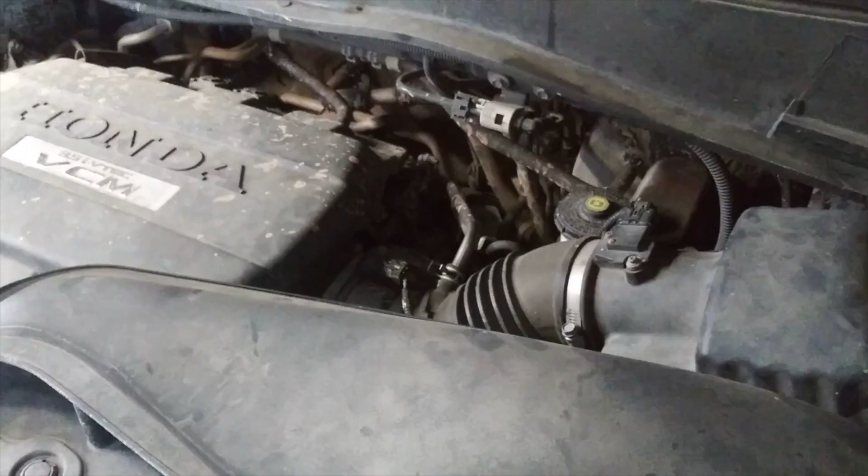Alright, I'm gonna get started by removing the stuff that we gotta take out. I'm gonna take out this air intake, gonna take out the battery and the battery tray. I got started with watching videos on older models and the Honda service bulletin, or the technical manual, which talks about removing these things. So I'm going to get started and check back in.

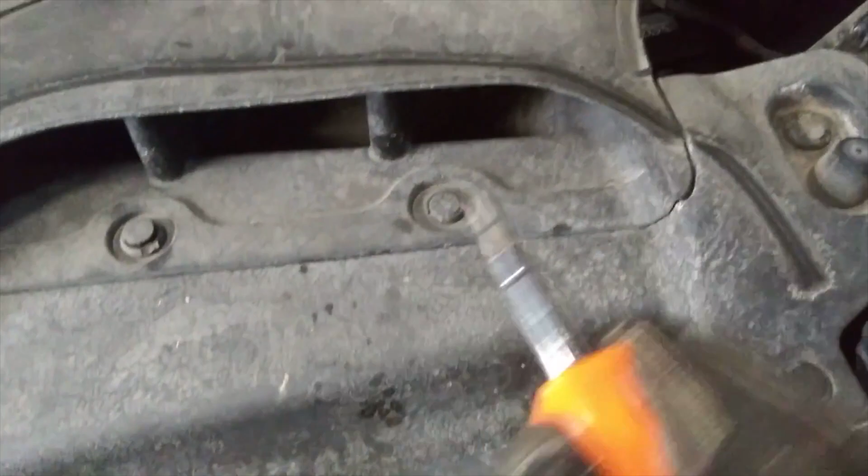Okay, first things first, holding in this manifold are these plastic clips, and just so that you can see how to do it, it's kind of a two-part process. You've got to pop up the center with a screwdriver. Oops, sounds like I just broke this one. And then the whole thing comes up, and yeah, you could see I kind of broke off one of those little ears there. Hopefully that's not too big of a problem. So I'm just going to go through and do all those.

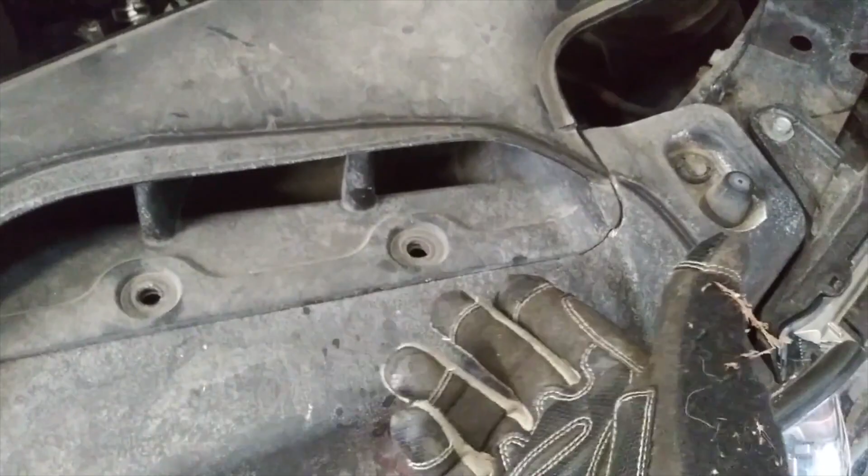Well, you gotta love it when I say I'm going to do all of those, and it's just these two right here. So now I'm going to just take the whole manifold off, or the air, I don't know what this thing's called, but there you go, just pull that off, and you can see it just gives me a lot more room to work with down there.

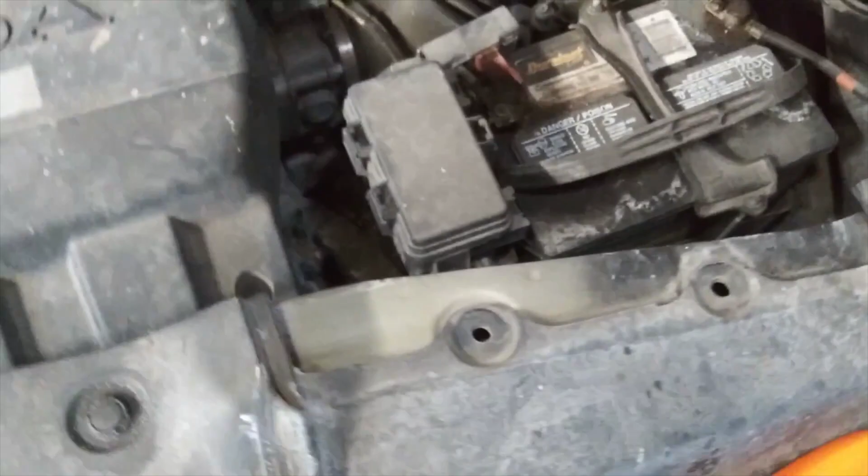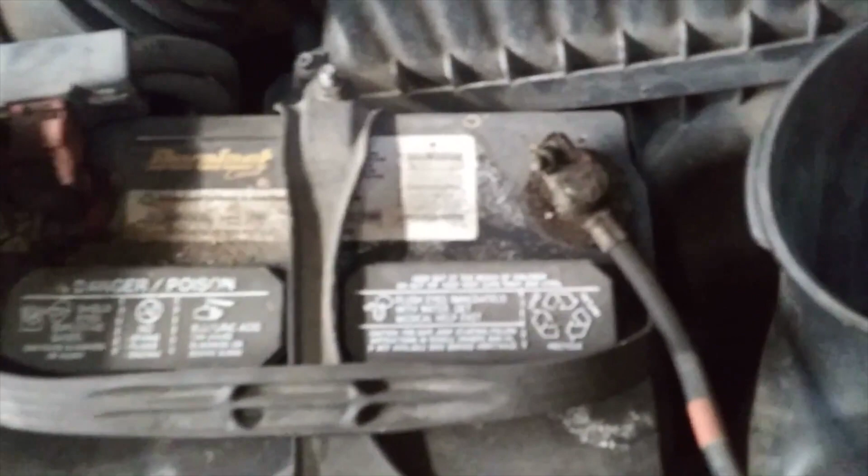So I'm going to, of course, take out the battery, but I'm also going to take this opportunity to look at the battery. I bought this car a bunch of years ago, and I haven't replaced the battery, so I'll see if I can find a date on there and see how it's doing. Well, looking at the battery, there's been a little bit of leakage. There's not a whole lot of corrosion.

I'm going to take off the negative terminal, then I'm going to take off the positive, then I'm going to take off this bracket so that I can get the battery out of there. Then I'm going to have to take off the battery tray that's down there. But when I take the battery out, I'll do a further inspection and hopefully clean it up and go from there.

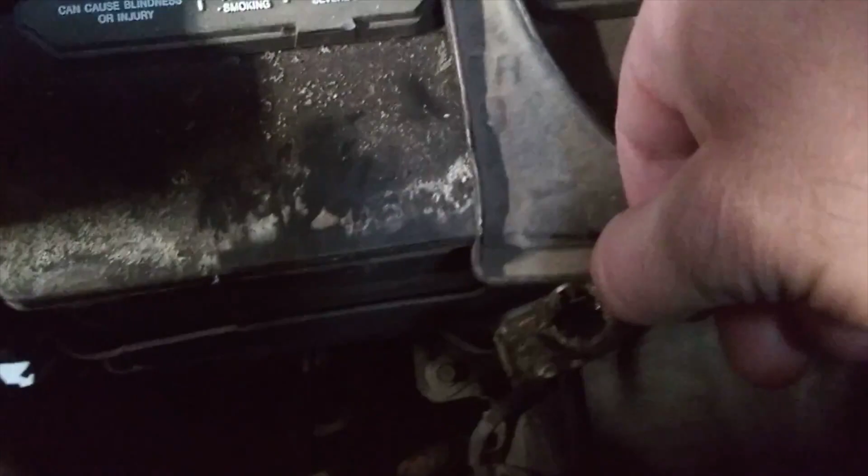I don't know about you guys, but for me, the hardest part of working on a car when you got to pull the battery is dealing with these little things that hold the bracket down. You don't have a lot of light down there, but there's this little post that's got a bolt on it, and you've got to get it loose enough so that you can push this down and pull out this little metal piece right here that holds it in.

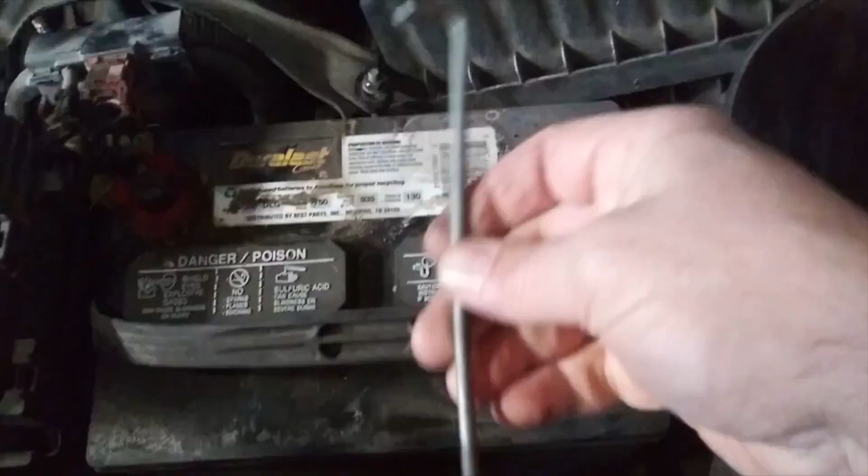So it just takes time, and it's frustrating because this thing will kind of wiggle, and you can't get a socket on there because it sticks up too high. I guess if you had like a high clearance socket you could. So anyway, you just got to take your time with it and get it off there eventually. I was able to get it off. I don't know if you can kind of see, but it hooks into the little tray and then holds this down to clamp the battery in place.

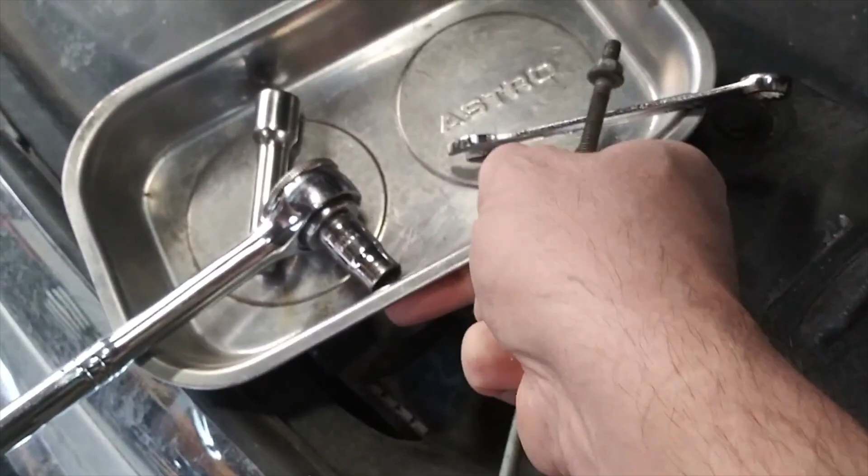I want to take a minute to mention this handy little thing. If you don't have one of these, when you're working on a car, it's super handy. It's got giant magnets on the bottom there, and you can see it just holds any metal part in place. So I use it for tools, but then when you start taking out bolts and screws and stuff, you just stick it in there and it's going to stay in place, and then you'll know where it is when you need to put it back in there.

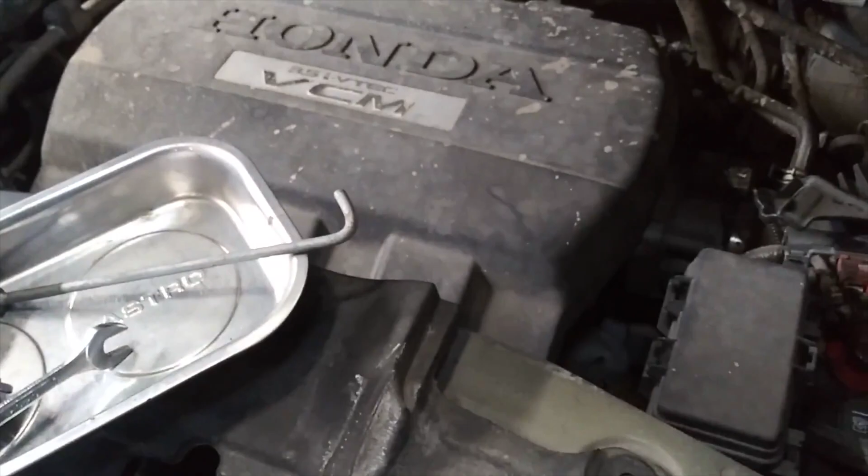Alright, I'm going to pull the battery out and see what I'm working with down there. I got the battery out, and looking on the side here, it's 12/16.

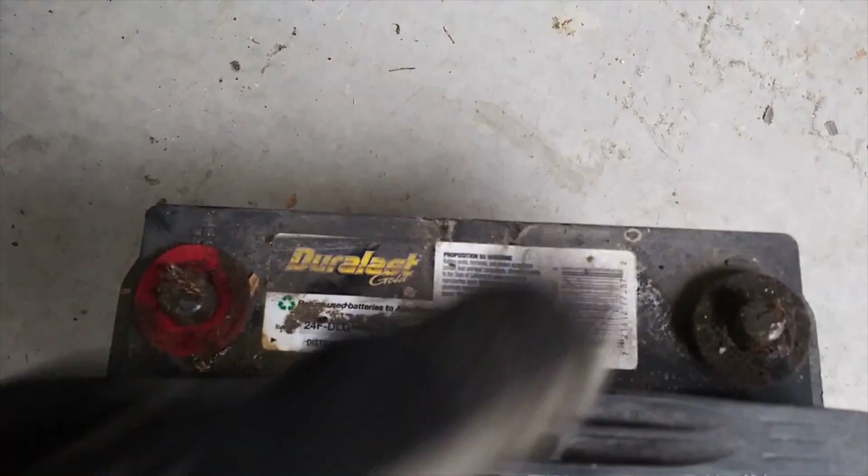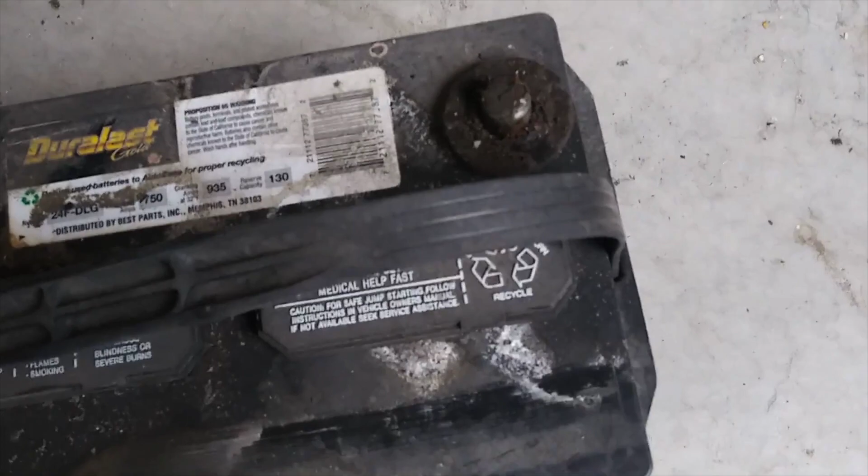It's now January 2019, so this battery's a little over 2 years old, so I'd say it's still good to go. It's kind of dirty on top, but not really corroded or anything, and the previous owner did a nice thing, put these little washer things on here and put some good grease on there, so I'm just going to kind of clean it up, not really functionally, just so it looks a little nicer, because why not?

Well, I got it a little cleaner. You can see it's not that big of a deal, but at least this way, if it was in focus, you could read the label and at least know what brand it is. I don't know, who cares?

Anyway, back in here, there's this plastic tub that the battery sits in. I'll clean that out a little bit too. I'm just going to set it on the side, and now we're getting into the meat and potatoes. The starter itself is located down in there, so it's kind of below the battery tray. So I'm going to work on taking this thing out. It looks like there's a bolt right there, and we'll see what else we got.

Okay, so this is like a whole thing. It looks like this is the fuse box, and it looks like it's bolted into the whole tray, which is also bolted to this air intake. So I'm just gonna start taking stuff apart and see what I can do to get this out of here.

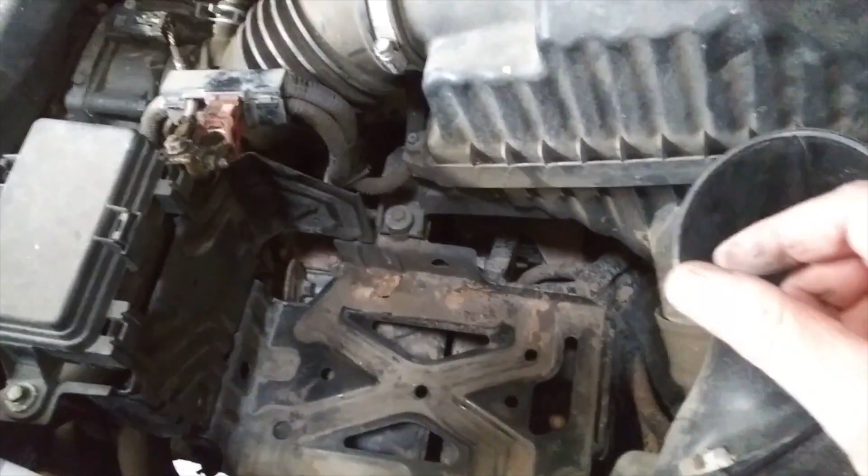It's possible that I'm not gonna be able to get this out of here, and I'm gonna have to come up from below to do the starter, but underneath the car, oh geez, that's a whole lot of no down there. Alright, so hopefully I'll be able to get this out of here and get in there.

Yay. I got this bolt out here. It's this guy right here. And then looking down here, this guy's got a couple of rubber gaskets that go around this plastic piece. So I'm going to pull that out and see if that gets me any looser over here. Okay, I got that bolt loose, and that's basically all that's attaching this to the battery tray. And then this has two little ears that you've got to pull out to slide this off, and now we have the battery tray free of the other stuff.

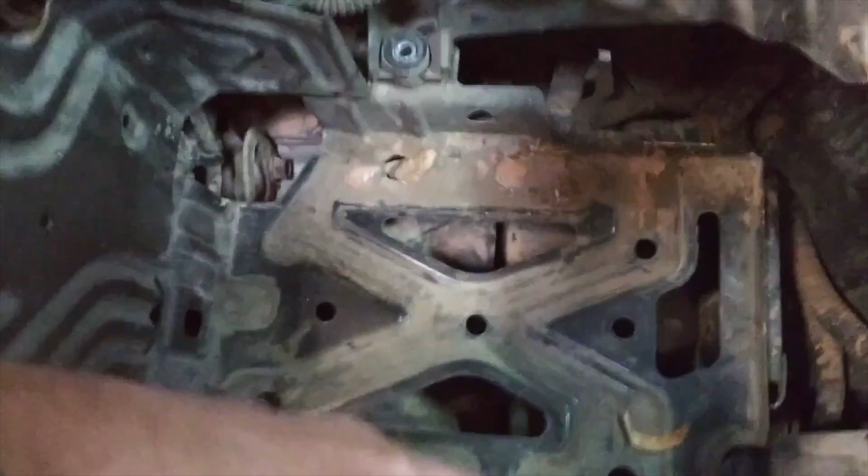It looks like it's bolted to the frame with two bolts, down there and down here. I'm going to start on those and see where I got to go. It might also be that guy is part of what bolts this to the frame, but I'm hoping not. There's also bolts down in there, which probably bolt this side to the bottom. I'm not sure if I'll have to take this off to get that out. We'll see.

Well, I screwed up and some cursing has ensued, but I've edited that out. So I dropped one of the bolts down there, and then that wasn't enough, so I dropped the socket in there. So what I did was go inside and get some of those nice little rare earth magnets, and I just taped them to this screwdriver so that I could reach down in there and grab it. I know I could buy one of those extendo magnetic bars, and hopefully I will, but I'm real cheap.

I got this side piece free, but it turns out there's a little plastic bracket that holds this wiring conduit thing to this. I'm gonna have to pop that off to free this piece. And there are actually two harness things that snap on here, and I don't really know how to get them off, so I'm gonna now just focus on taking the bottom out, because I think I can leave this in place and then access the starter that way. We'll see.

Holy cow, that was challenging. Alright, so that bolt, easy. Even that bolt, not so hard. This guy, super hard, because the wiring harness kind of covered it up. So there's 4 bolts to get this. I'm now working on this one.

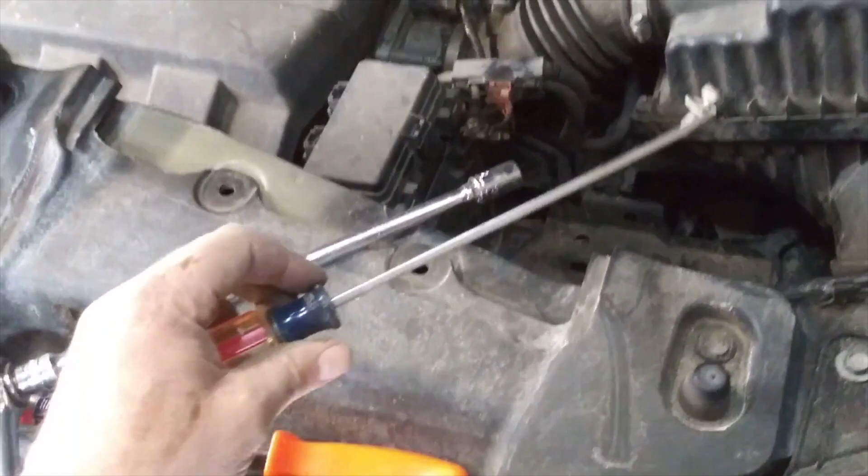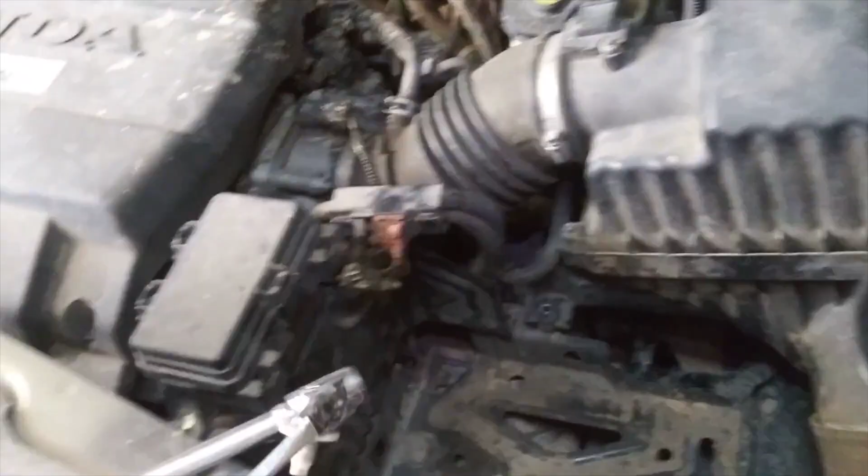I gotta say, my little magnetic buddy here is really coming in handy, because getting into there is super hard, so I would definitely not try this job without one of these tools. Well, so those were definitely the 4 bolts.

The tray is loose. The issue is that it's being held to this wiring harness, or realistically this wiring harness is held to this to hold it in place by this kind of plastic zip tie. And it kind of goes through to the bottom or the inside of this, and so I think I'm just going to cut it off and see how it goes.

Well, yeah, cutting that zip tie definitely got this free. I mean, if this is a have to do for the job, I would just cut it first, because it'll make it a lot easier to get to that bolt that's holding this thing down. Okay, let's see. Okay, still held on. So that's this side of the battery tray.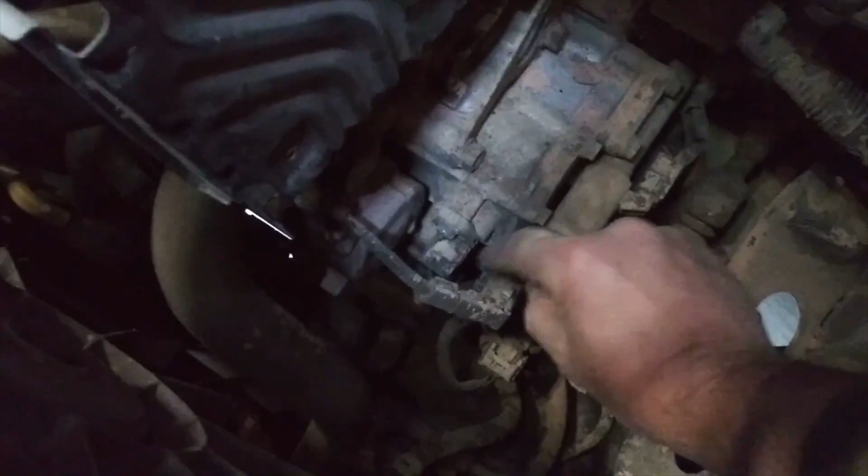There's the starter. I can finally actually see it right here. Looks like I'm going to be okay with not having that there, and I'm just going to dive into the starter now. One more thing, I'm also very lucky because there's that bolt I dropped, and it's sitting right where I need it.

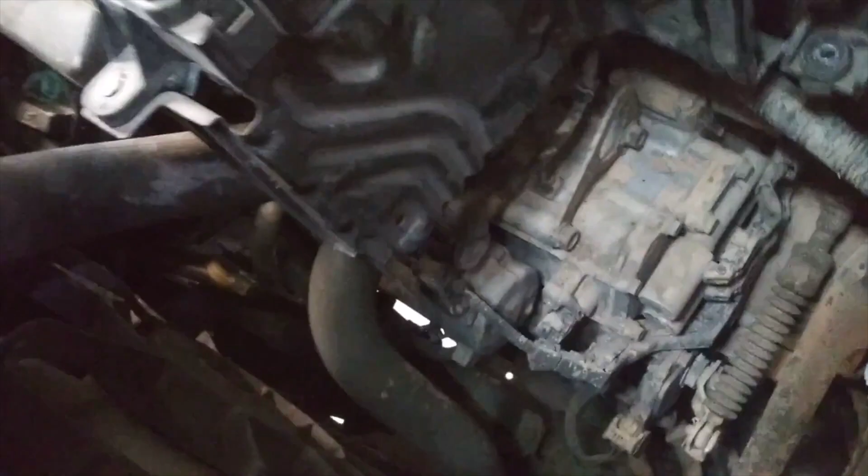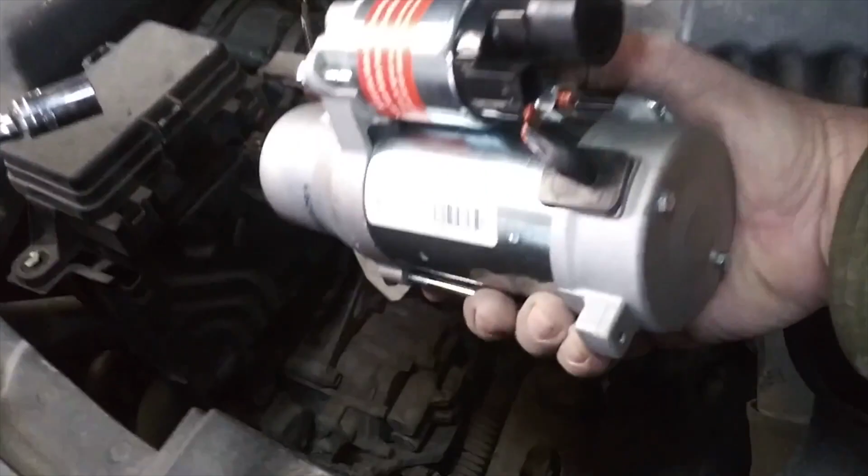Something that I think is kind of handy when I'm replacing a part: this car's 9 years old, so after 9 years of dirt and road and wear and everything, the part that you're replacing kind of blends into the background. So I like to take the replacement part so I can look, especially for electrical connections.

So, when I'm going down here, I can sort of see, oh, well, there's where this wire comes into here. What does that look like on my actual replacement part, and that way I'm probably less likely to break something.

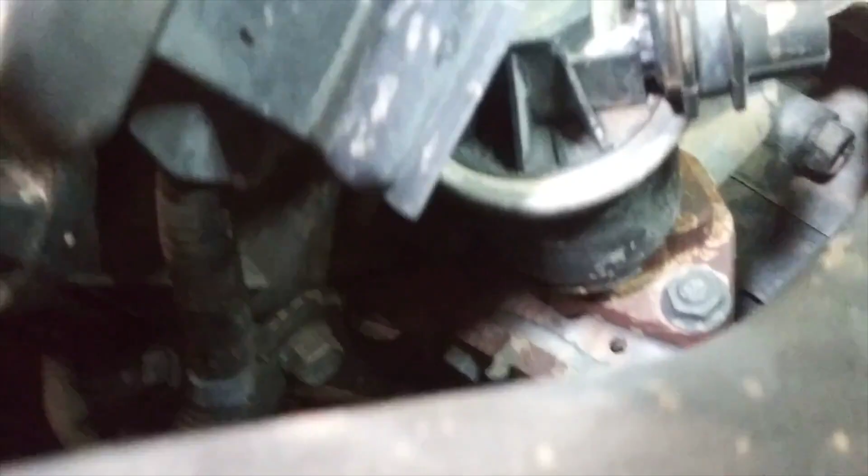Alright, here we are, finally getting down to the meat and potatoes of the starter. So, there is the starter right there. Oh, this is horrible lighting. Let's see if I can do anything to improve it. No, not really. Anyway, the starter kind of hangs out down there.

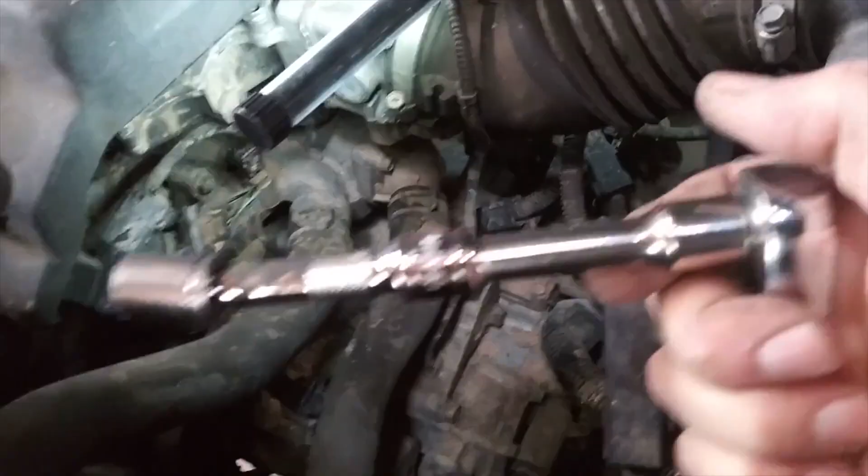I've found I'm going to have this 14mm socket on 2 extensions. My other extension is just too long. But I got to kind of thread it around, well, maybe it's the thermostat, I'm not sure. And then to get it down into, oh, this is horrible, you can't really see it, but there's the top bolt right there.

Before I do that, I'm going to see what getting to the bottom bolt is like, and just see what combination of things I'm going to need to make sure I have what I need. Okay, well, top bolt is out. Man, that is hard to get to. You really got to thread through this thing with those 2 extensions.

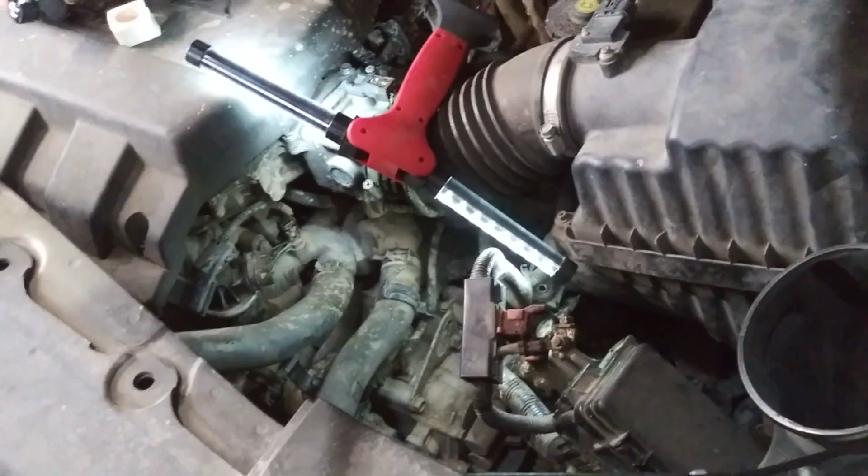I had to use a breaker bar, so I put this old bike tube on here to hold the wrench in place, and then use that section of old fencing pipe. Once it broke free, it was super easy to get out, but getting it to break was hard.

Now I got to dive into the bottom bolt, which is incredibly hard to get to. There's like no way to even get light down there. You can't actually see it, but there's this wire thing. That's the transmission fluid dipstick, which I took out, and the bolt is back here, but getting that clearance is super hard, so haven't quite figured it out, but was too frustrated to keep trying. So now that I got the top bolt out, there's no going back, so here we go.

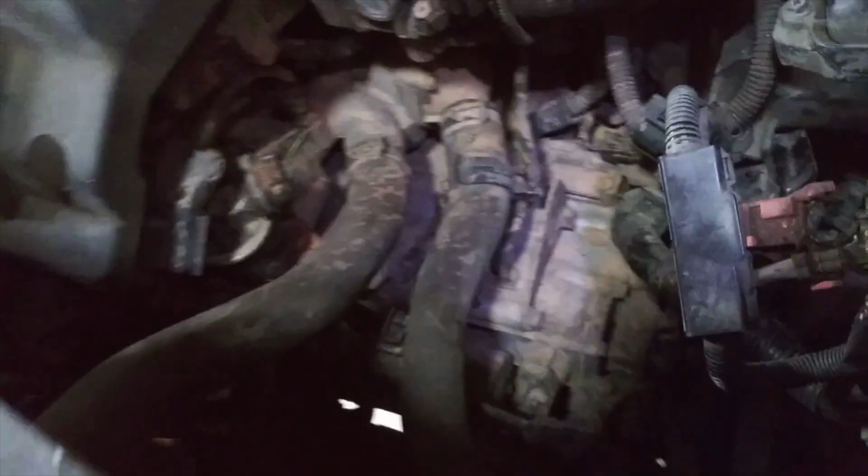Well, that was crazy interesting. So basically, in order to get to that bottom bolt, you gotta kind of thread through and around this stuff. Let me hit that light. Gives us at least a little something.

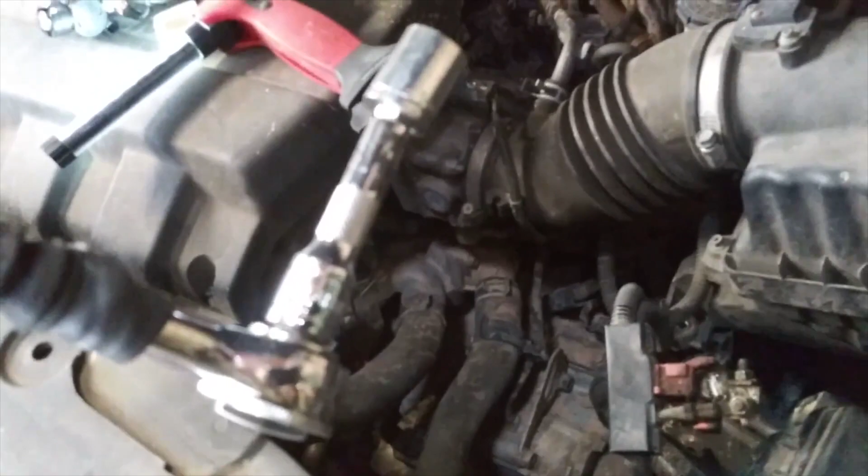There's like, man, I don't even know if you'll be able to see it at all. No, not really. But basically, right to the left of the transmission fluid dipstick, there's a thing you gotta kind of go in. I went in with the 14mm and then a socket and then this thing, but you gotta thread the socket wrench on so it's facing up, because you're gonna need to get that breaker bar on.

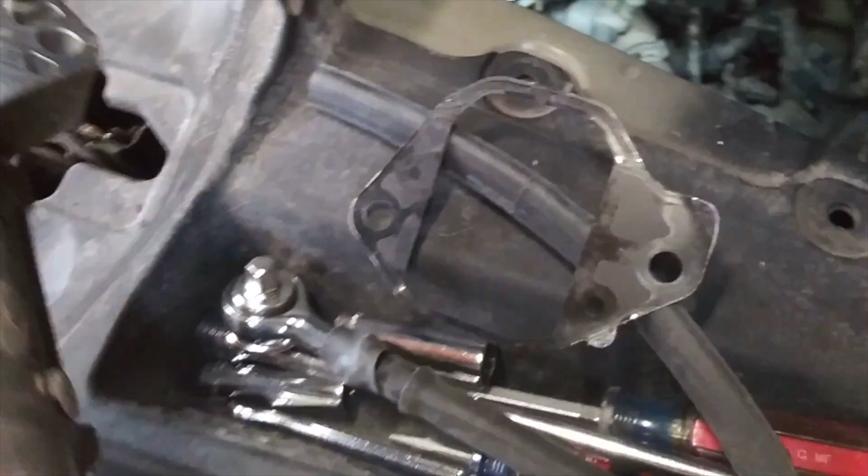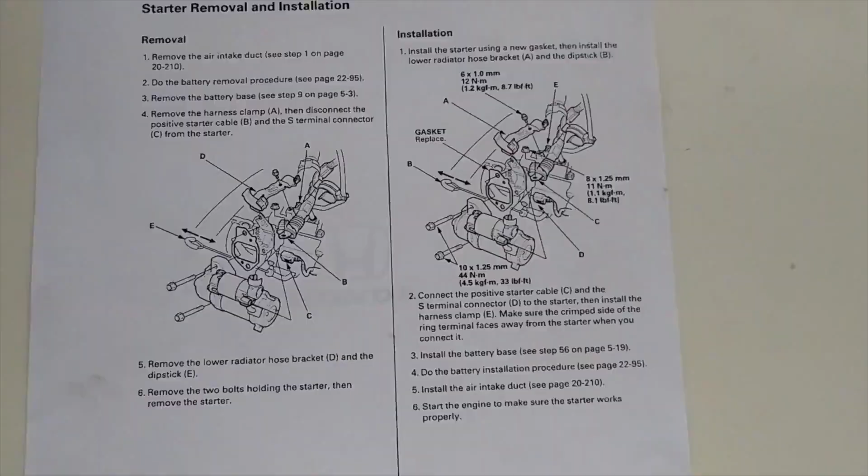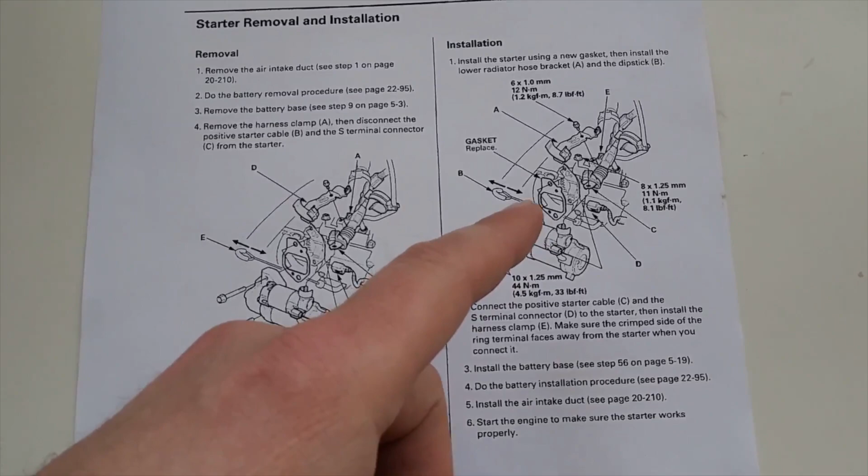So that's where my phone ran out of recording space, so it stopped recording. What I was going to say is that's where I should call my father-in-law, because he would tell me what to do. And he advised what the service manual suggests, which is to replace the gasket. It says replace, theoretically I guess I could go to Honda and buy a new one, but I just put the old one back in there because it was in fine shape.

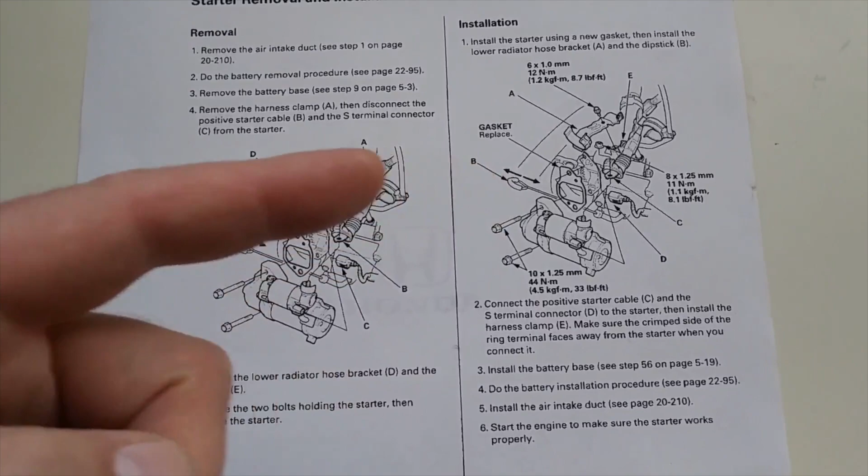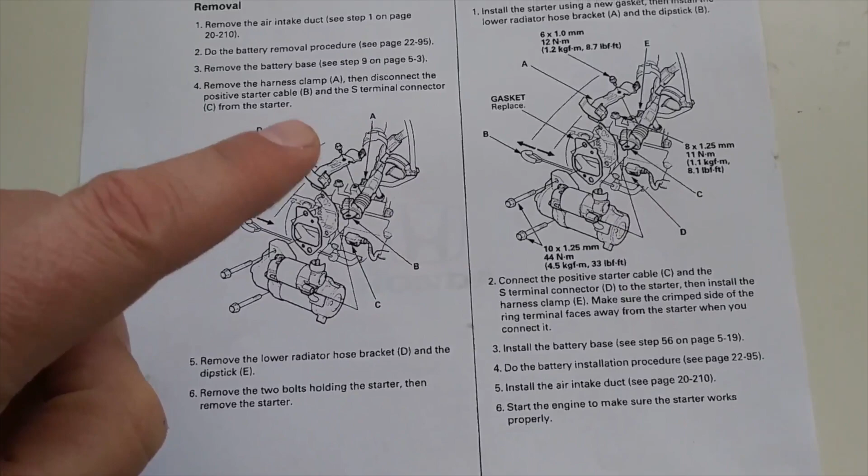Also, I wanted to point out that on the removal, it does say to remove this radiator hose bracket. I ended up just popping the radiator hose out and moving it over, but it does call to remove it, and that would make it a little easier to get down into the starter.

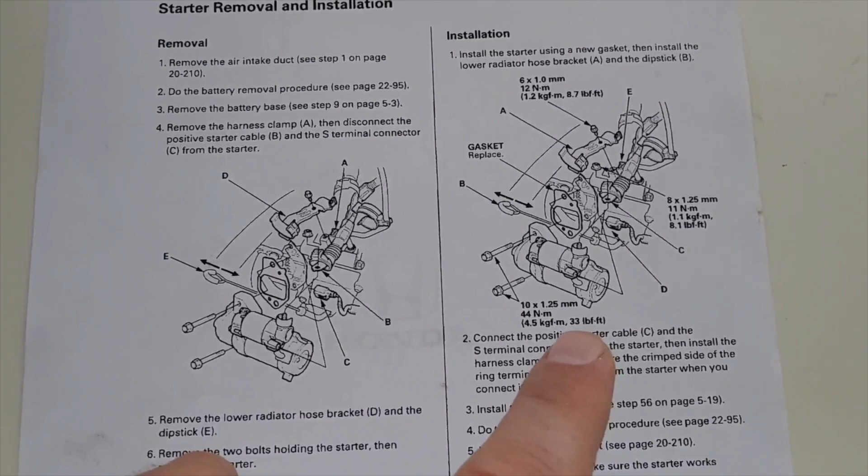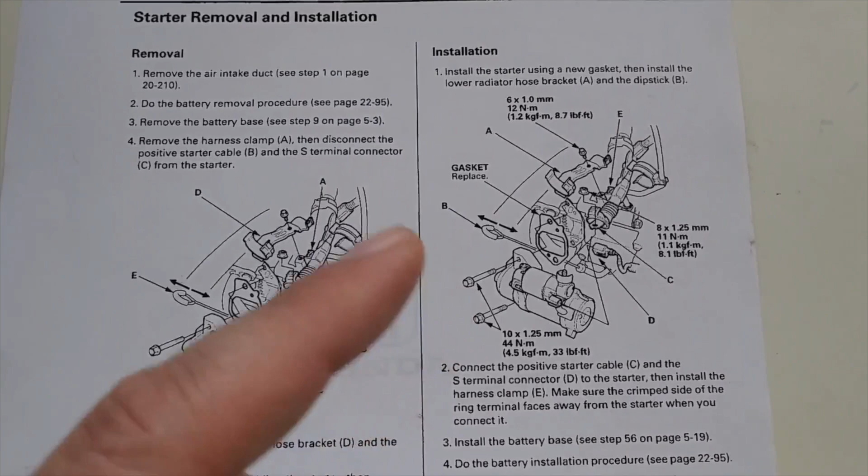Also, on the installation, it does have the foot-pounds for a torque wrench when you're tightening these bolts. I had to borrow a torque wrench from my father-in-law because I don't have one, and he did say that's definitely important because there's an aluminum head on the engine and you don't want to strip those bolts out or you'd be in for a world of hurt.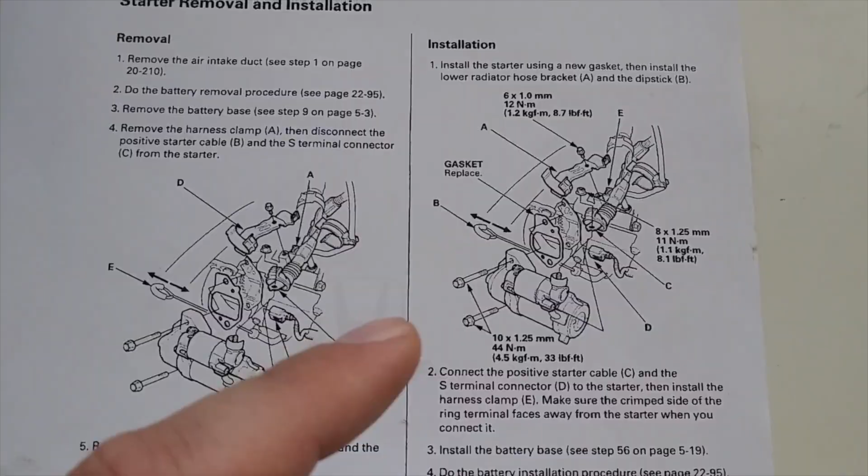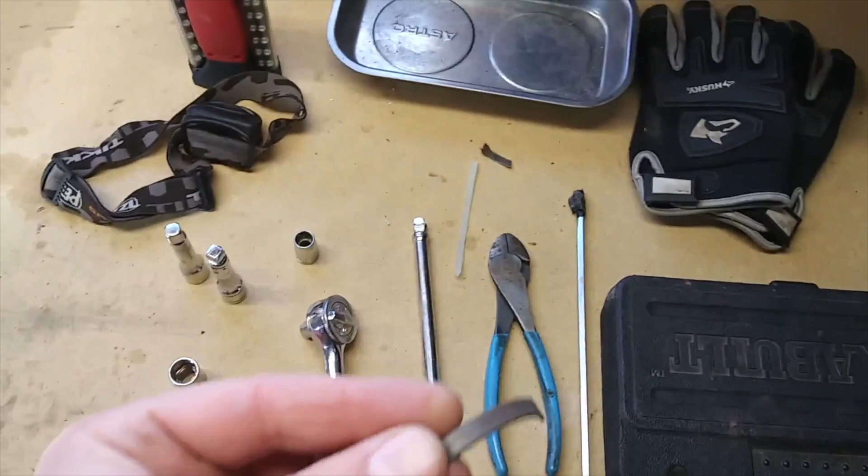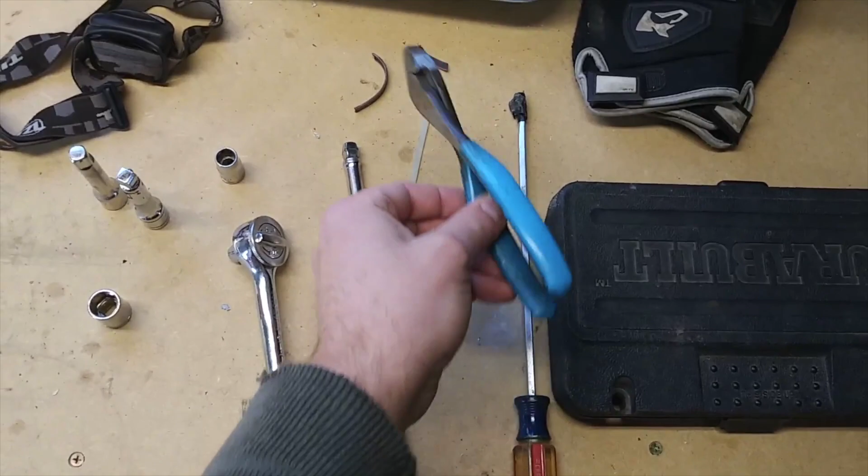Now I'll show you the tools that were necessary for the job. Okay, here are all the tools that were required for the job. Some lighting there. That light actually kind of sucks, but it worked. Headlamp is definitely needed for this job. There's that magnet tray I pointed out, and there's my handy little magnet on a stick helper tool. This is the zip tie that was in the actual car, and I replaced it with just a regular standard zip tie that was approximately the same length. I needed these cutters to get in and cut that zip tie because it's a super strong one.

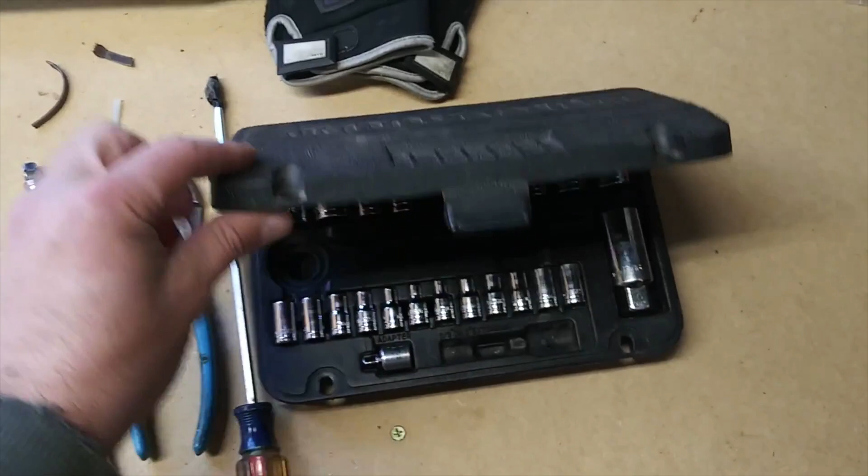This is where things get interesting. So you need a 10 millimeter socket. You also need, this is my handy third hand here, a 14 millimeter socket. This is my socket set that I've had for like 20 years, and it's actually really good. I think I bought it at Walmart or Target, but it doesn't have a 14, so luckily in the ye old tool chest I had an extra 14.

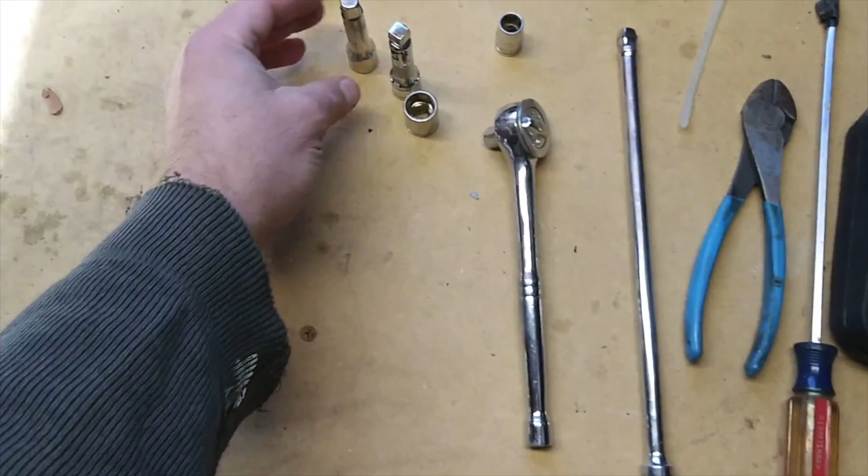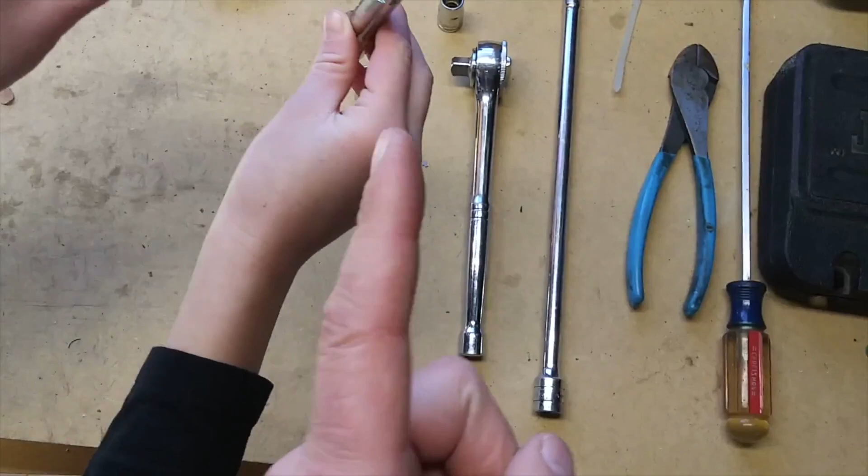And then I definitely needed these two 3-inch extensions, and this super long extension was really handy. If you're buying tools, I would highly recommend, it's nice to have, this is like a straight one that locks the socket on straight, and then this is one that has a built-in wobble, which I really felt was necessary for this job because you can come in at an angle but still get the socket to sit onto the bolt. And that's about it. Some gloves that I ended up taking off, and yeah, so good luck, enjoy.